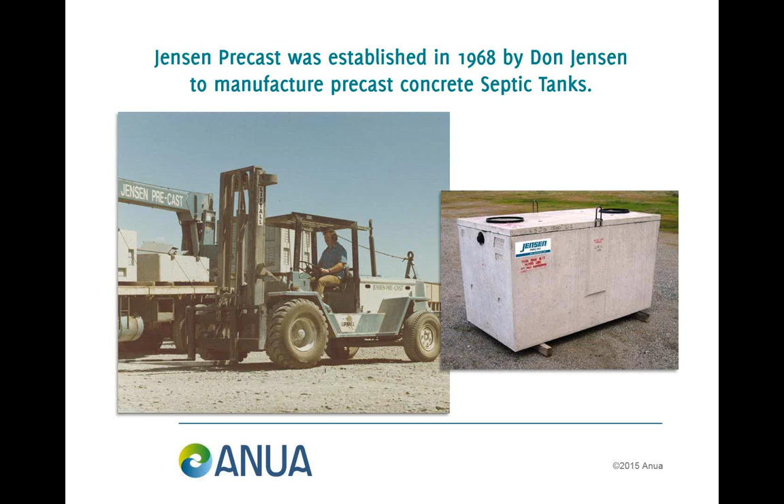We've had a lot of people ask, we know Jensen Precast makes precast concrete septic tanks, but what do you know about advanced on-site wastewater treatment? Well, we know a lot about precast concrete septic tanks. Don Jensen founded the company in 1968 to make septic tanks, so we've been making them for 47 years. We have grown from the first location in Sparks, Nevada, to now 15 facilities throughout California, Nevada, Arizona, and Hawaii. We have over 1,500 products with over 5,000 variations. The company was founded by Don Jensen, who is still our CEO. All of his children actually work for the company. It's a family-owned company, and we've grown to be one of the largest independently family-owned companies in the United States.

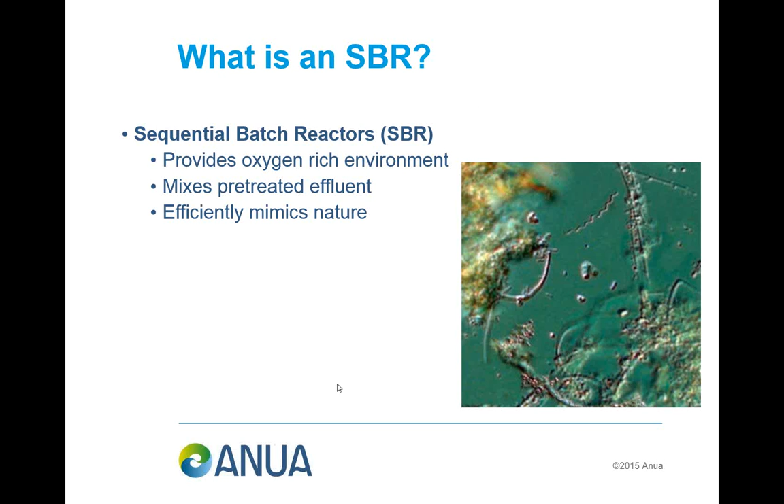Oops. See if I have it.

So you can see there's typically SBRs, and you can look this up on the internet, and you'll find different graphics, but there's typically 5 steps.

The first step is where effluent is brought over and filled into the reactor chamber, and then the aeration cycle starts. The aeration cycle is variable and can be adjusted based on the flow you're seeing and also the waste strength. Some of that process will be self-adjusting through the panel. But it's through stage 2 that we cycle and do aeration. We can turn the air off and allow for denitrification.

So one of the unique things about SBRs is they tend to do simultaneous nitrification and denitrification, which is not typically what you see in most other processes.

The next stage would be, if you look over on the right side, number 3, that's the sedimentation or clarification stage. That's where you leave that chamber quiet for a couple hours and allow the solids to settle out into the bottom of that tank.

And then that leads you, after that time cycle, into the clear water discharge. One of the advantages with this technology on the residential level is it has the built-in discharge pump, saving you the space of having to have another pump tank.

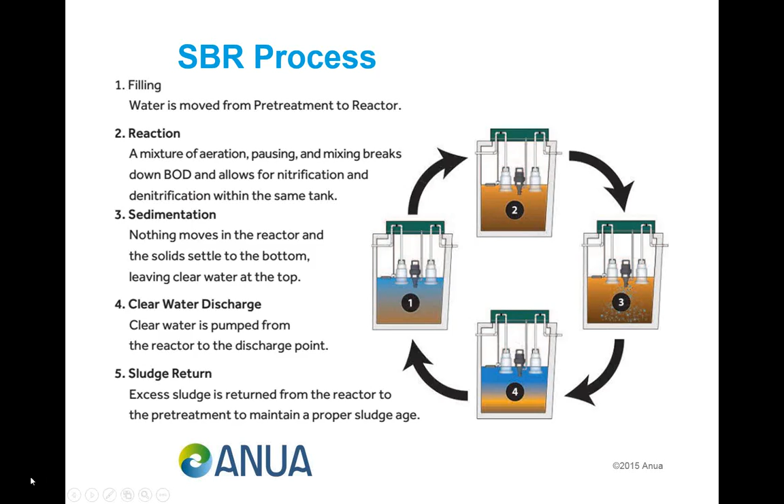And then after that happens, there's a sludge return cycle. So the aerator will come on. You don't see a box there for step 5, but the aerator will come on, stir up the contents of the tank again, and then you'll pump off some of the sludge.

So when you look at the anatomy of an SBR, on the residential level, we typically are going to have a 2-chamber tank. One of the advantages is you can do all this in one precast concrete tank. As you get into bigger systems, you can break these into 2 separate tanks, or if you're doing a retrofit situation, you could utilize, for example, the existing septic tank and add the reactor chamber.

But it's basically broken into a pretreatment chamber or a primary tank, and this can be just like a normal septic tank that's set up 2/3, 1/3.

The reactor side, you can see there's 3 things in there. There's the aerator, shown in the middle. There's the sludge return pump, which also acts as a siphon during the fill cycle. And then there's the clear water discharge pump.

So it's really simple. One of the nice things about this technology is we don't have to ship tanks all over the U.S. We can actually ship all these parts and components in boxes, and so it's cost effective and helpful to get it all around where you need to get it.

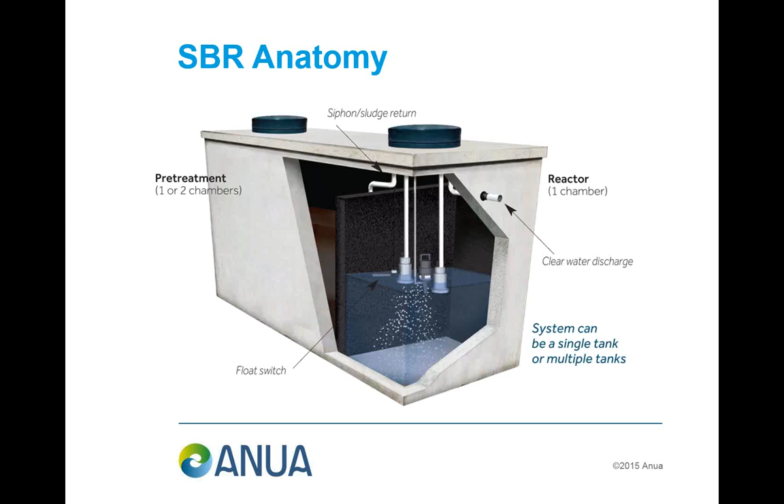So one of the things it's referred to as is a step fill process, as we talked about just a little earlier. Through that smart panel, you're able to know when effluent enters and when you're filling it in. So one of the advantages is I'm going to take a discrete volume of water and bring that into the reactor chamber. And because I know what volume I'm aerating, that's why I get more efficient treatment.

So if you compare that to other conventional ATUs or treatment processes that don't control time, somebody could uncork their garden tub, have a dishwasher load going, have the washing machine going. All those processes could be going on, and that slug of water goes out through the treatment system.

That's a gravity treatment system where you have no control over the process. So you might be under-aerating at times, you might be over-aerating at times, and then the other problem is the avoidance of sludge bulking. You're not going to wash solids out to your drain field because of those high flows that go through there.

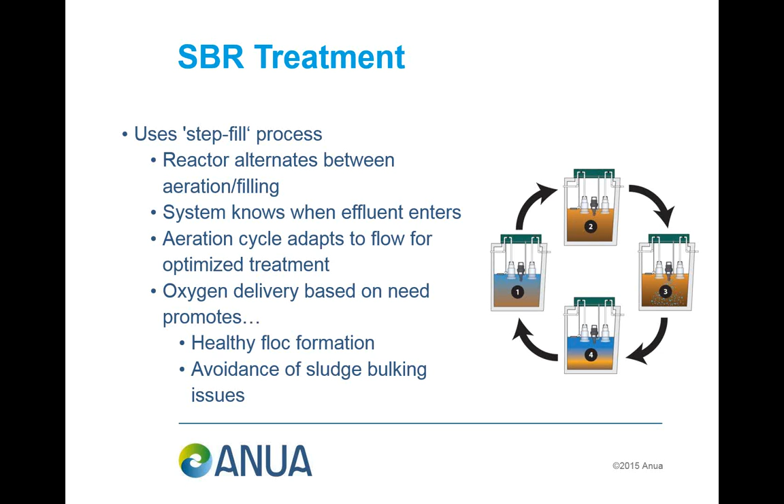So the huge advantage to this is that we really have optimization of the treatment process in that reactor chamber, and that leads to healthy floc formation, healthy bacterial colonies that are actually going to perform the treatment the way we want it to. Now go to the next slide.

So obviously on the pre-treatment side, just like a lot of people, we use a septic tank and we circulate through that as their anoxic zone and carbon source. It's the same thing in this. When we bring effluent over from the pre-treatment tank over to the reactor chamber, that provides a carbon source for the nitrified effluent that's already there. And so one of the advantages to this technology is you get really high levels of nitrogen reduction, which for a lot of places out in the West Coast, California, Arizona, some of the different intermountain states, nitrogen is one of the big limiting factors.

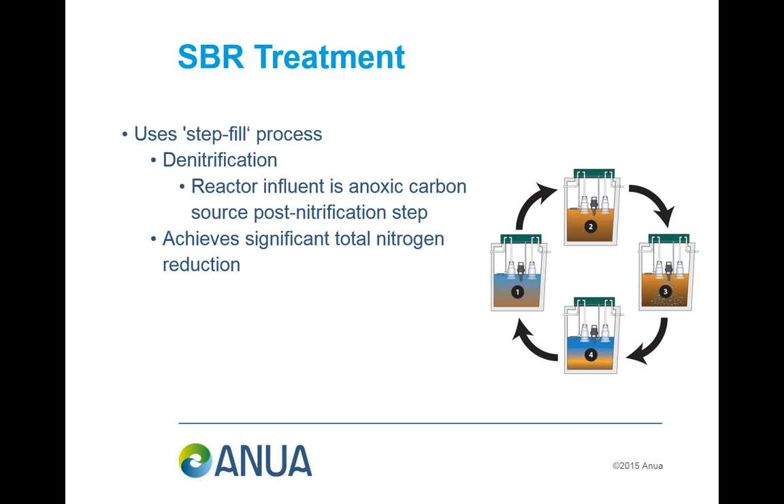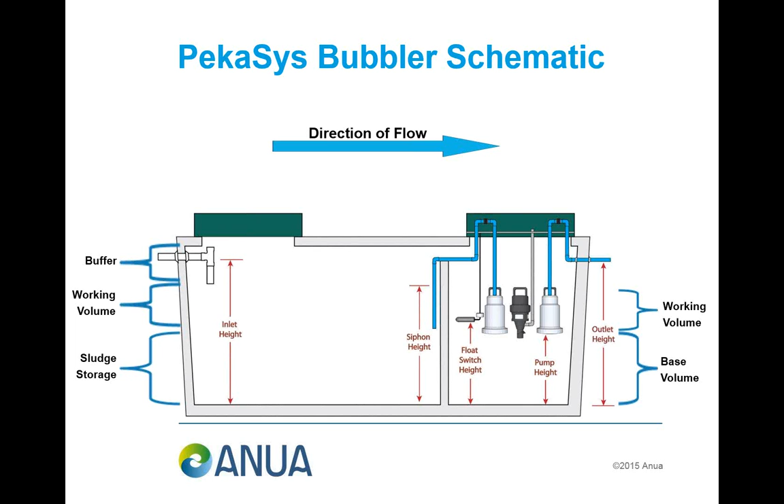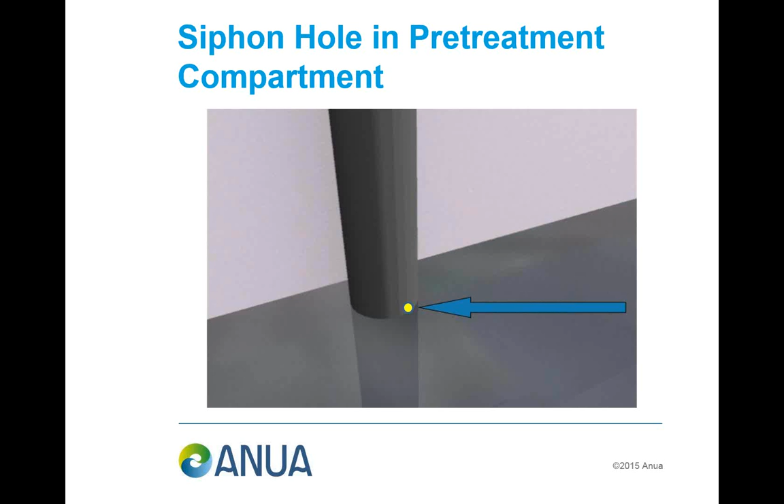All right, next slide.

So one of the things that you can look at doing from a design standpoint is, we encounter a lot of different situations in on-site systems. You may have, for instance, a home that is not used a lot during the week, and maybe they run a bed and breakfast type business out of it where they do a lot of stuff over the weekend. Maybe they have parties on the weekend. There's a number of different scenarios in the industry that we deal with, and so if you need to add a larger pre-treatment tank, that will obviously add more buffer volume for you, and that's one thing from a flexible design standpoint that you can do. It's real inexpensive, obviously, to increase tank size and provide more volume if necessary on the primary side.

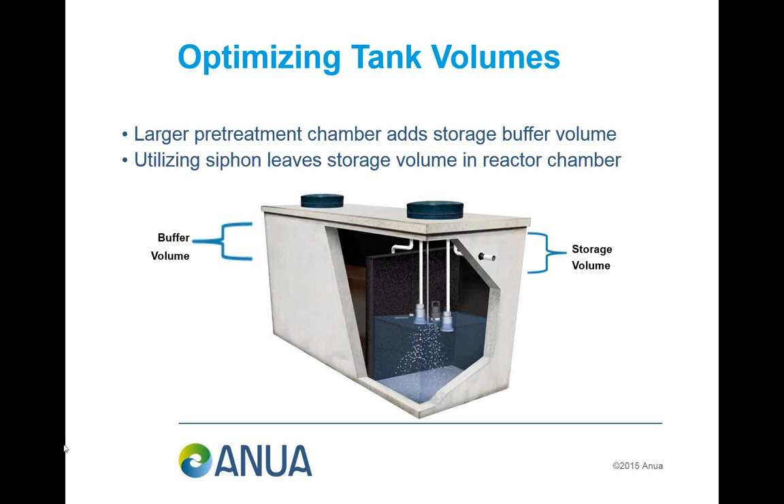All right, next slide.

So this chart is in our reference manual. For that pre-treatment volume, there's only two design things you need to remember for these bubblers from tank sizing. There's a pre-treatment tank sizing, and there's the reactor tank sizing. The pre-treatment tank sizing is just going to be sized based on how you would size a septic tank in your area. So if your local code or your state code says a 3-bedroom home needs to have a 1,000-gallon septic tank, then that would be the size of your pre-treatment tank. And then this table shows you the size of the reactor tank that you have to have, and you can see that there's a range there. This is based on the NSF testing that was done.

So one of the things with the SBR, though, like all systems, is you want to try to optimize the flow design of this thing. And that's where sometimes the on-site codes get a little bit squirrely because a 4-bedroom home may be designed on 600 gallons a day, but in actuality, they may only be using like 200 to 300 gallons a day. So it's something to keep in mind when you look at sizing these, because we really want to size that reactor chamber based on the actual flow that it's seeing. So that's one thing to consider. And again, you can find this in the reference manual, which is on our website.

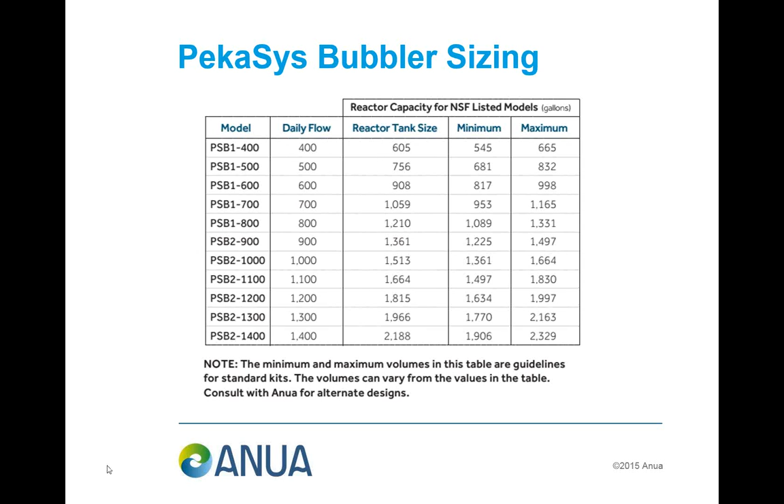So, as we talked about, really the bubbler is going to allow you ultimate flexibility in tank selection. So there's a few keys that you need to be aware of.

We want the tanks absolutely have to be watertight and structurally sound. And then, as I mentioned earlier with that dividing wall, that needs to be watertight because we can't have effluent from the pre-treatment tank sneaking around the wall there and getting over to the reactor chamber, because then we're not going to be putting out effluent that's treated to the level that we want it to be.

The other thing is it needs to be able to withstand the pressure differences. The liquid levels in those two chambers are going to be different levels. So it has to be able to structurally handle that non-shared liquid level. That's something to consider.

So for a precaster like Jensen Precast, it's not an issue. If you tell them, I need this baffle, I need it to be watertight, it needs to be structurally sound, for precasters that's not hard for them to do. But if you run into a situation where you're dealing with a fiberglass tank or a plastic tank, there are some manufacturers where those baffles are watertight and structurally sound, and it could handle this type of situation. And there are other manufacturers where that is not true. The baffle either isn't watertight or isn't structurally sound enough to handle different liquid levels. So keep that in mind when you're doing designs on these.

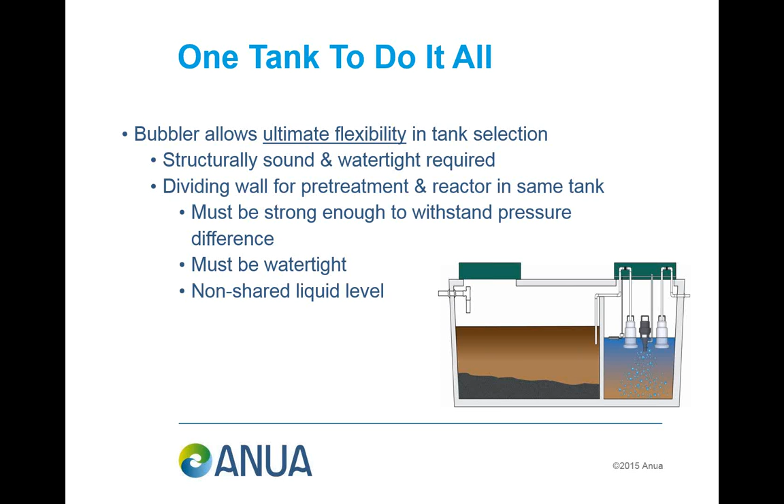This just shows you, for example, different precast ways. So the top left corner is a 2-compartment precast tank. The tanks that are typically 2/3, 1/3 split are optimal for these systems, the 2/3 side being your pretreatment side and the 1/3 side being the reactor chamber.

You could do a 3-compartment tank if you had to. Now where you might see this is, even though this has a built-in discharge pump, you may have a requirement if you have a very large field that needs to be dosed, or a situation where the pump in the reactor chamber is not big enough, then you could have a 3rd compartment there to pump out of.

You can use the round cylindrical tanks. The bottom right-hand corner shows a single compartment pre-treatment tank followed by a precast concrete manhole. So one of the great advantages of this is whatever you can get your hands on for tanks, as long as they're good quality and watertight, you can use them for this type of system.

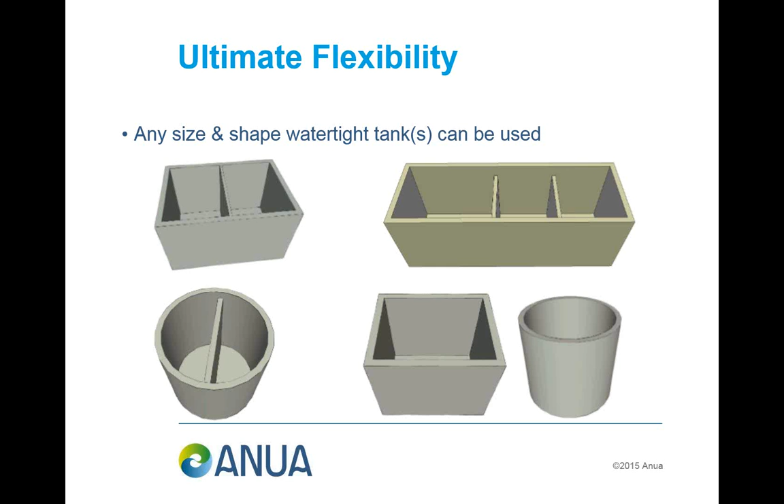All right, next slide.

Obviously, the advertisement you guys received for this webinar talked about the brain. With an SBR, it's all about the controls. So you have to be able to control those different processes that are going on, those different steps, and so they're absolutely critical for any SBR.

The good news is we work with a company that produces the controls, that they're in the on-site business. It's Alderon Industries, and with the software that was developed and programmed into the Alderon panels, it's actually a successful implementation in the on-site market.

So you can also see why in the on-site market we need to have buffering capacity in the tanks, because if we're aerating a discrete volume, you can't have effluent flowing into the treatment chamber at that time. So that's another reason you have to have that buffering capacity.

But we have very robust controls that come along with this. They can be reprogrammed. If the situation changes or the design parameters change, it's very easy to reprogram this and swap that out if you need to. It's also easier for the operator to make minor adjustments on timer cycles or settings if they need to.

So if you get out there and maybe the water use and the waste strength is not as high as you thought it was going to be when it started up, it's easy to throttle back the aeration cycle and not aerate as much and change some of those parameters. So this is critical for any SBR, and one of the good things is this has been robustly developed and tested and is applicable to the market that we all work in. So it's the brain. Always remember, for SBRs, it doesn't matter whether it's ours or anybody else's.

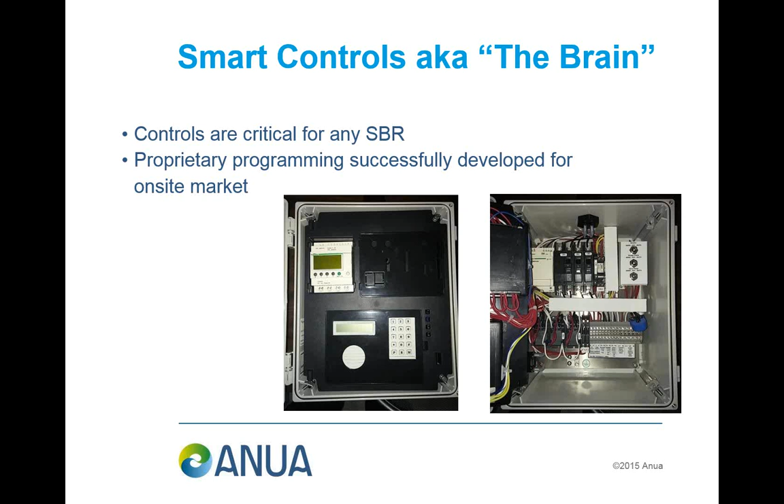You better know what the brain is, and you really need to make sure that you have robust controls of that. The other thing to point out in the picture on the left, some states require auto dialers, and the picture that you see on the panel there actually shows the auto dialer built into it, but there's still a lot of jurisdictions that don't have that, so if in your area you don't have that type of thing going on, then you wouldn't see that auto dialer in there that's on the bottom left picture.

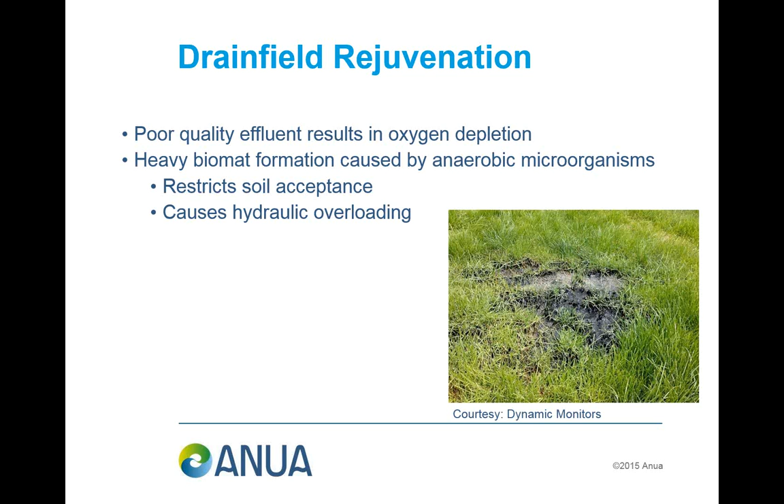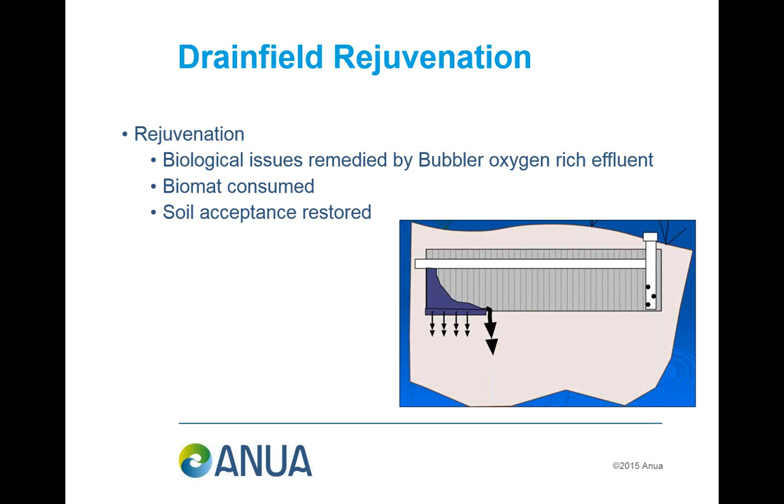So when I put oxygen out there, once I have an effluent that's now treated, which would be low in carbon and high in oxygen, that biomat is going to start to break down, and eventually what will happen is you can restore the soil acceptance. But this should be pointed out that you can't fix every drain field this way. If there's root intrusion, or a high water table or something else going on as the cause of a drain field failure, this is not going to remedy that. This would only remedy situations that are biological failures. So if you can confirm that it's a biological failure, then a process like this would be able to rejuvenate the drain field. Next slide.

The bubbler has been tested to standards 40 and 245. Standard 40 is the one that most people are probably familiar with, that basically just looks at BOD and TSS. And standard 245 is actually the nitrogen reduction standard, and that demonstrates that you can get less than 20 milligrams per liter or 50% reduction in total nitrogen.

So for the NSF certifications, there's two kits. There's one that does up to 800 gallons per day, and then there's another one that does up to 1,400 gallons per day. The basic difference in those is just the size of the aerator, so the sludge return pump and the discharge pump would be the same, but the aerator is a larger aerator for the higher flows. And then what we don't have here, because NSF only applies to residential systems, is when you get into commercial systems, we can go up to a lot higher flows than 1,400 gallons per day. But those would all be designed based on the actual establishments that you'd be looking at, or the commercial facilities.

If you have areas out west where nitrogen reduction is a restriction, you can use this as the first level denitrification. What we're finding around the country is the standards are tightening up greatly on both ammonia and total nitrogen. States aren't ignoring BOD and TSS, but we're kind of moving beyond BOD, and they're looking heavily at ammonia and total nitrogen. In some areas, total nitrogen requirements are under 10, and in some areas ammonia requirements are under 1.

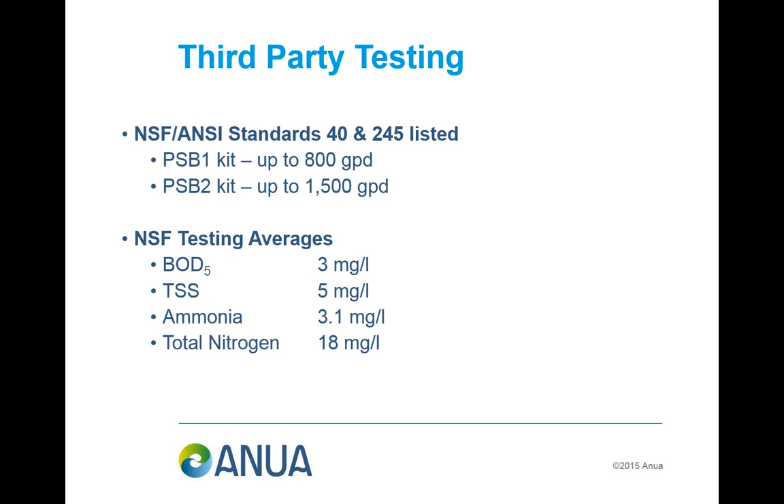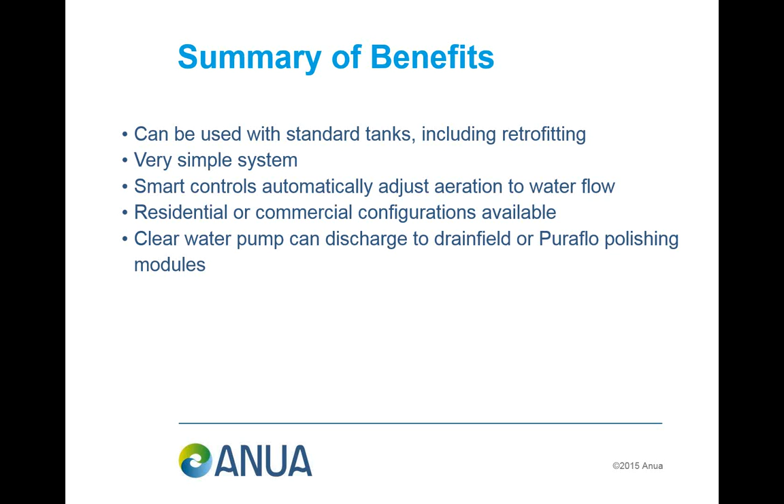A couple summary benefits, just reminders - you can use any type of tank. It's very simple technology: you have an aerator, a couple pumps, controlled by a smart panel. There's not things to clog up, there's no filters that need to be cleaned. It's a very simple operation, which in a residential setting is really nice.

Just to remind you, residential and commercial configurations are available. We've talked more about residential today, but you can do larger commercial systems if that's of interest to people.

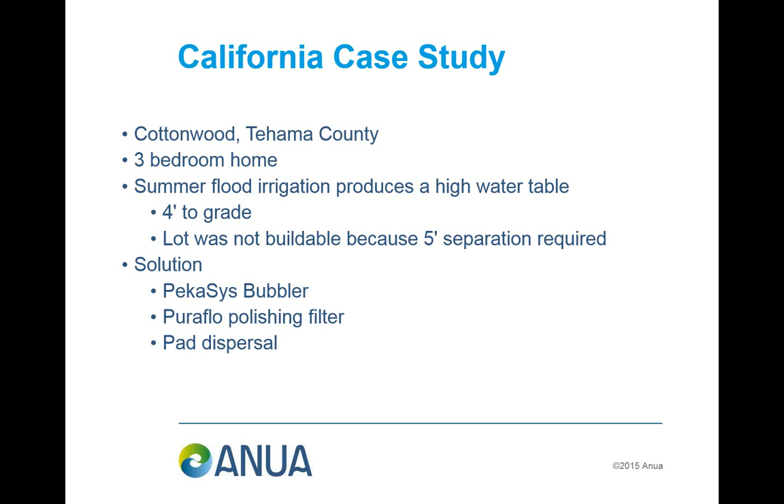We were able to install it very quickly. It was very easy to design. Myself and one other person put it in, in about 3/4 of a day. The holes were already dug, but so it was really easy. The county really likes it.

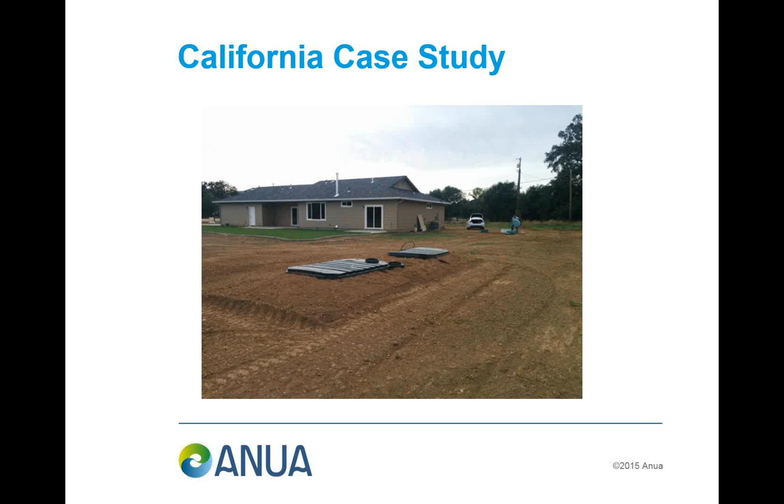From a cost standpoint, it was also good for this job because we were able to make the lot buildable. We were also able to beat all the competitors on price, which is important for most installers. We did that because first, the price of the units is fairly low compared to other equivalent treatment technologies, but also we were able to reduce it down to one tank, saving the price of a dose tank. We were also able to use only 2 Puraflo modules instead of 3 because of the pretreatment, which saved some money there.

So again, we were able to put this tertiary treatment system in and get a lot to be buildable. I had this on site for way less than what the competitors were doing, with no drip fields or anything like that, which would have been the alternative. It's also a very simple system to maintain. We don't have a lot of bells and whistles. There's essentially just the pump units you're seeing there. Everything else is passive, so we're not flushing filters or any of that kind of stuff, which made it very easy to deal with all the way around.

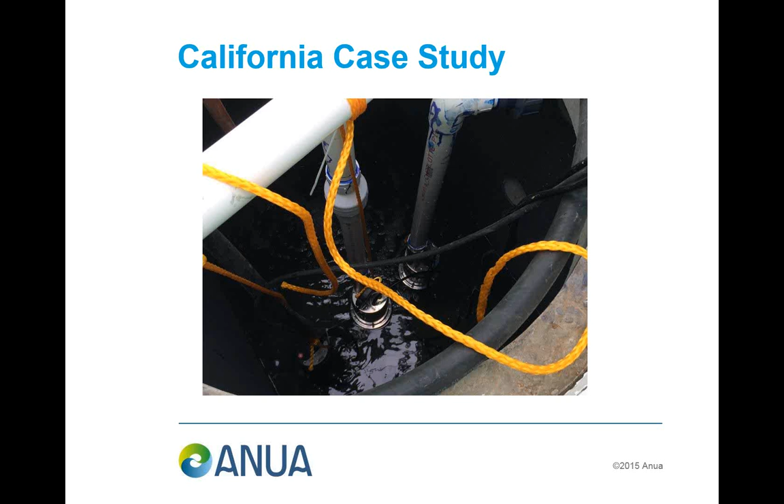For those of you that aren't familiar with the Puraflo system, that's another technology we make. It's a peat biofilter, and one of the huge advantages of a peat biofilter is very high quality effluent, but it's also very well known for its pathogen reduction. It can also do enhanced nitrogen reduction too. So we get great nitrogen reduction with the bubbler, and then we put the peat biofilter behind it, and that knocks out the pathogens and more nitrogen. When you go into shallow dispersal, like pad dispersal, you get even more denitrification there. So you're typically well under 10 total nitrogen, and your pathogens are down at full body contact standards right when you hit the soil or within a few inches of it. So from a water protection standpoint, it's pretty much the highest quality water you can get, right up there with other treatment technologies that can do that.

You can see one of the things we're starting to do is bundle the technologies in the treatment processes to get different results depending on the site conditions. So here's a project in New Jersey. This hasn't gone in yet, and I'll let Charlie talk a little bit about this one since he's involved in it.

This is a repair situation, and it's an incredibly difficult site. It's a 4-bedroom application. It was actually a failed conventional system, and the property was completely surrounded by wetlands and also in a flood hazard area. We worked with an engineer out of New Jersey, and frankly, it's really taken off out there because of the really small areas and high population density. I'm anticipating probably 80% of the installs will be failed soil absorption systems out there. This went into an LPP, or a low pressure drain field.

So go to the next one. This is just a site plan we have here. I'm anticipating that probably close to 80% of PekaSys' use will be in the retrofit market where you've got failed systems. I know this is a small image, but you can actually see the boundaries for the wetland. So what is the solution for a failed system? They're not going to kick the people out of their home. This was a very cost-effective solution, actually.

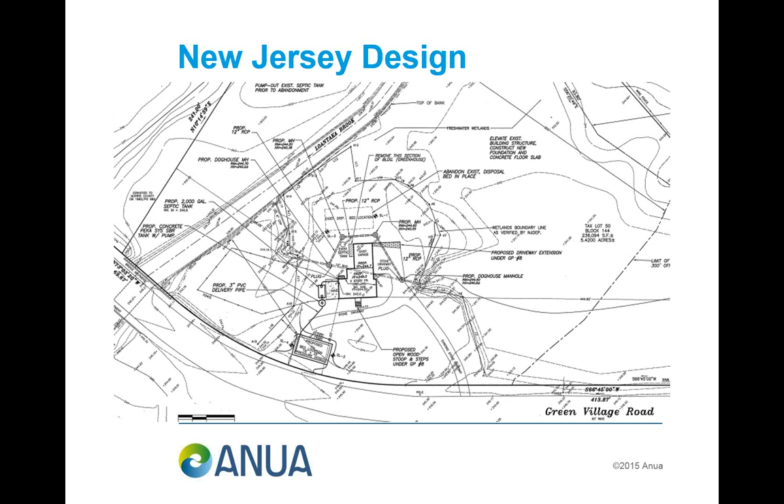What I'm finding from our distribution in New Jersey is the treatment level of the PekaSys combined with Puraflo — if you look to your left, if you have a microscope, you can actually see they've got modules built in. This is a very cost-effective solution and very high treatment, to where, New Jersey being very strict in their regulatory code, probably one of the most strict in the country, they were able to put that in that sensitive area.

Charles, Chris has a couple of questions. He wants to know what the approximate yearly maintenance is — the rest of his question was lost there — but he also wants to know what the pump lifespan is. I'm not sure, Chris, if that was applying to the California Puraflo case study or the New Jersey one.

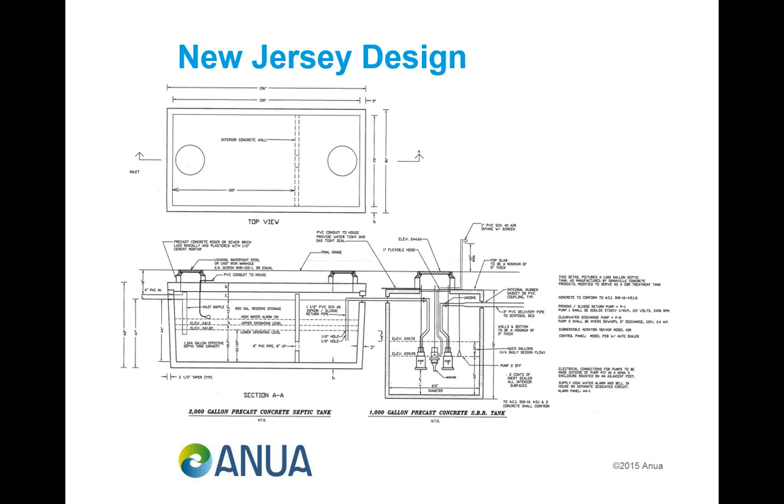In our manual, it talks a little bit about the maintenance. I think it's relatively simple. My service providers out in New Jersey are pretty pleased with it so far in regards to what they're having to deal with. There's only 3 mechanical items in the system itself. The real key, which is kind of unique, is how they pull the sludge. They go down with a sludge judge and check the sludge level to see how healthy it is. It's a visual type of application, and you can make adjustments based on what the actual sludge looks like. So there's not a whole lot to a maintenance visit per se.

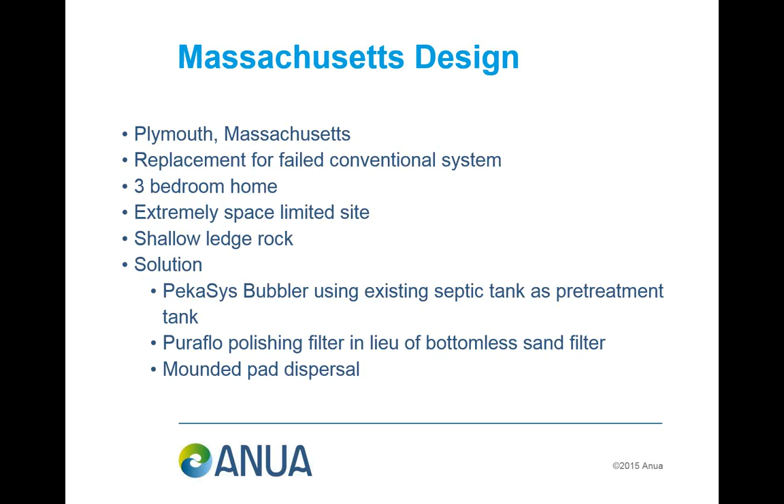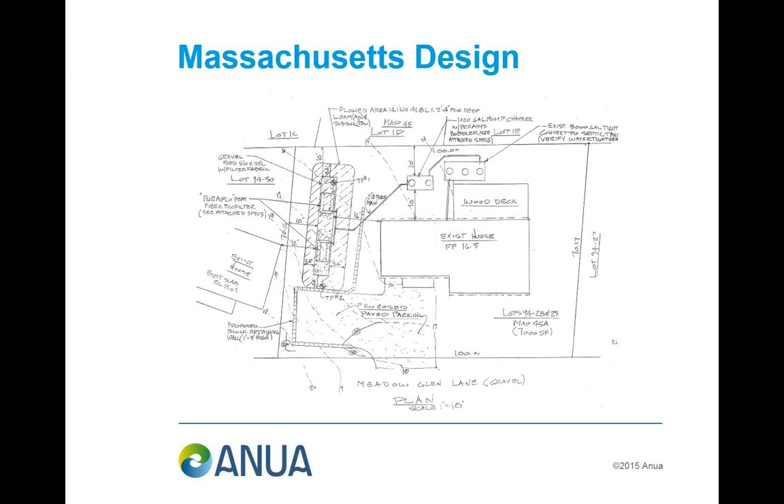Right beyond the deck is the existing tank they're going to use as a pretreatment tank. So all they had to add to this site was another tank for the reactor tank, 2 Puraflo modules, and then the mounded pad that's below it. A mounded pad is built a lot like a Wisconsin mound, only you end up with a lot less sand in it, and a lot less of a footprint because it's pre-treated effluent. You can see that mound is actually pretty small. So that's it - this is for this very tight site that needed high-level treatment. We're able to use existing components, add new treatment to get nitrogen reduction, and then add further polishing and an elevated drain field to actually meet the site constraints. It's so space limited. All right, next one.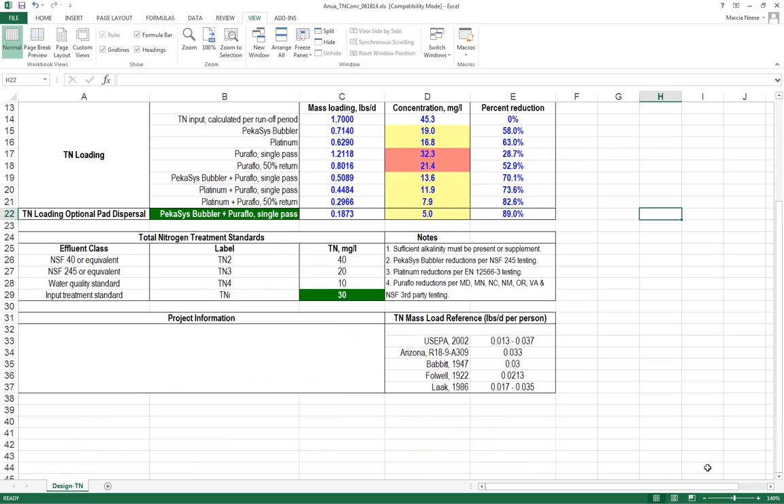So what we did is we take the nitrogen loading. There's inputs with that spreadsheet where you can actually look at the number of people, the flow per day, the nitrogen input in pounds per day, and also the treatment standard you're trying to achieve. So if you look down at the bottom, you can see different nitrogen treatment standards, and you can even input your own. One of the things about the spreadsheets we do is the only stuff you can change is the green shaded boxes, so everything else will auto-calc for you, and you don't have to worry about messing stuff up.

So these are helpful for whether it's a residential or, more so, commercial systems where you can actually do a nitrogen analysis. And then you can see all the different technologies we have in the middle part, whether it's the PekaSys Bubbler by itself, Puraflo, Platinum, which is another system we have, or combinations of those systems. And also at the bottom, the combination of that with pad dispersal - then you can see the expected nitrogen reduction you would get from those technologies.

Now you probably ask where these numbers come from - they actually come from third-party testing, most of it from third-party field testing, stuff that's actually out in the field where we know what the reductions are and what the performance is. So between the pad, for example, and Puraflo, whether it's single pass or recirc, and the other technologies, we have a good handle on the type of reductions we expect to see. Obviously these numbers aren't fixed in stone - there's parameters that play into that where the numbers could move around just a little bit, but it'll at least give you a target that you know you're in the neighborhood of where you want to be for nitrogen reduction, which for you guys that participated in the poll, you said is a big issue for you.